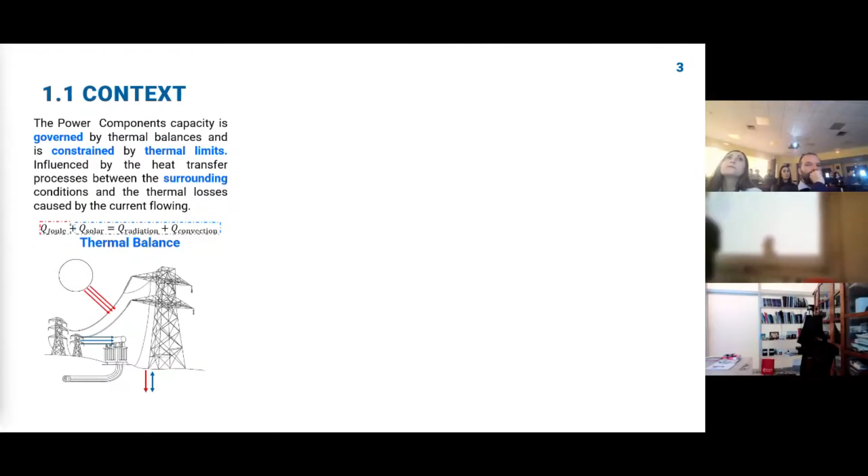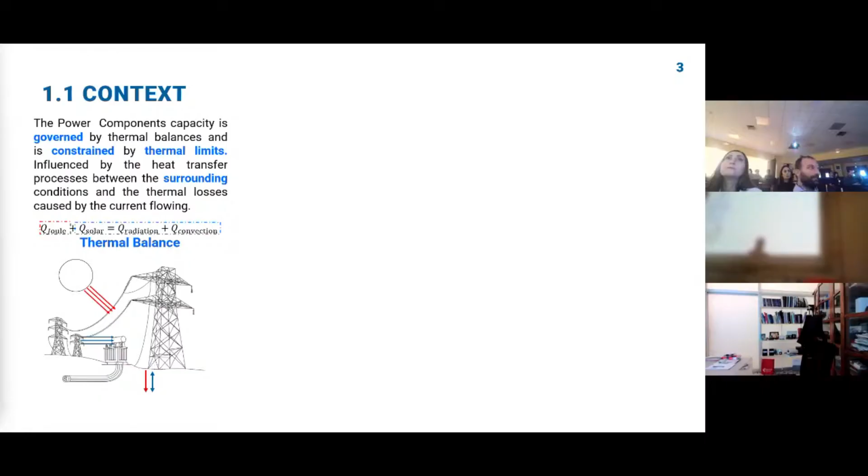Thermal limits. The thermal balance is being influenced by two main factors. The first factor is the heat coming from the current flowing inside the component. The second factor describes how the surrounding medium has the ability to decrease that heat.

In particular, the maximum capacity, the maximum current that could flow inside the component, is proportional to the delta between the temperature of the ambient and the maximum temperature of the component. So if the ambient temperature starts to increase, the capacity will decrease.

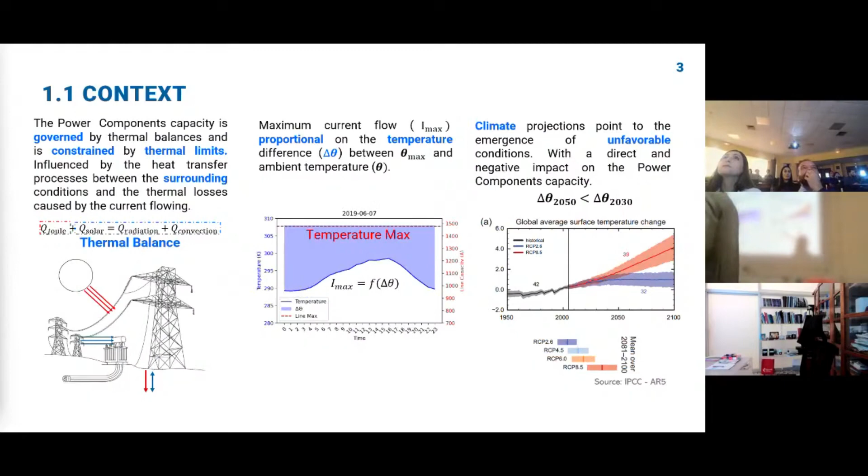However, climate projections point out that the ambient temperature will probably increase in the next decades, meaning that this delta for 2050 will be smaller than for 2030. But we don't know how much. So that raises my first question: how can we project reliable thermal limits for the next decades?

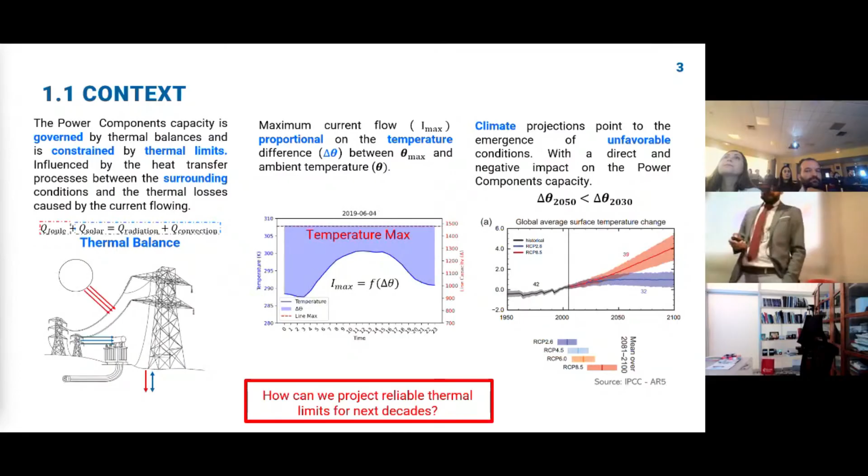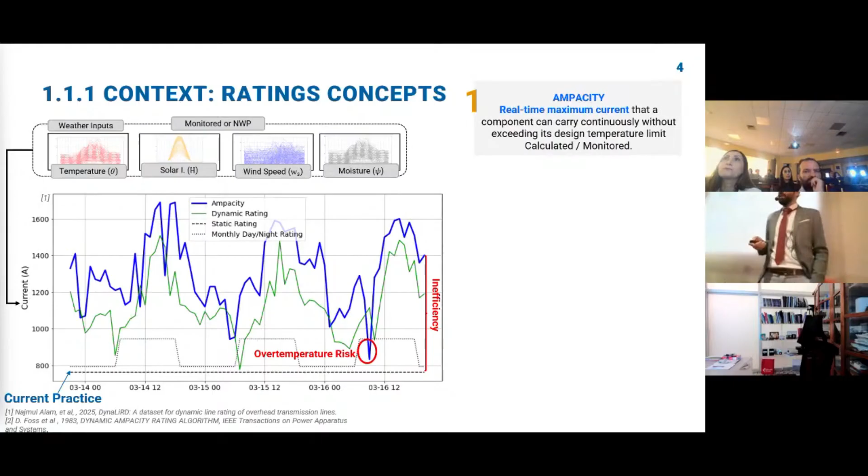Before we explain the method, let me explain three fundamental concepts in this investigation. The first is the ampacity. The ampacity is the real-time maximum current that a component can carry out safely. It could be calculated or monitored, and here you will see it in blue.

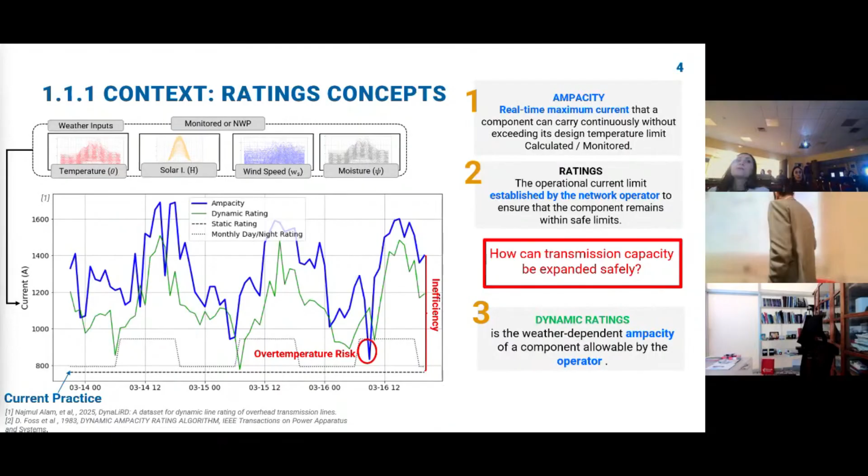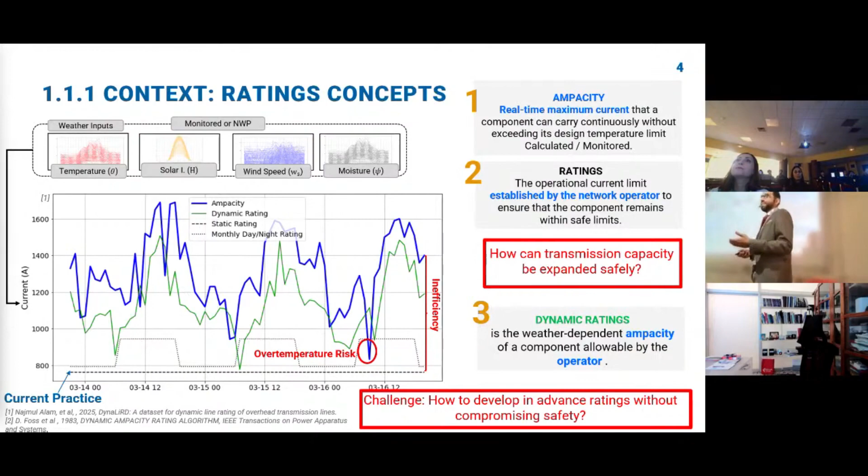However, this concept is mainly related to short term. So that raises a challenge: how to develop thermal ratings in advance without compromising safety?

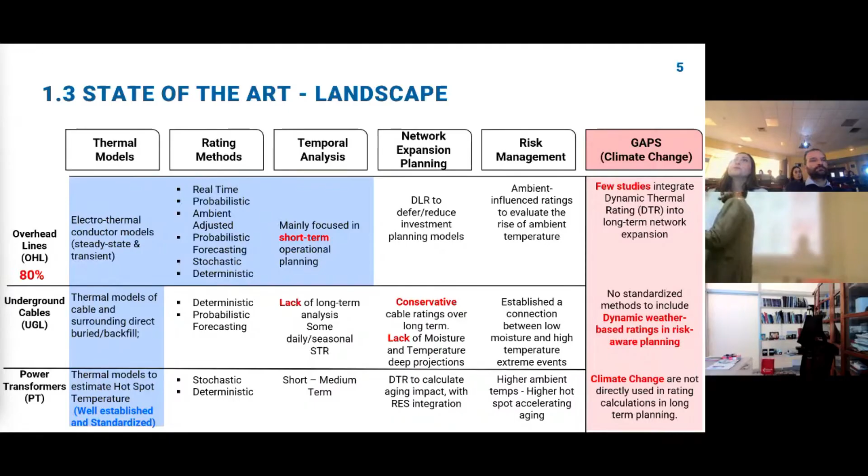Now that you can see the full landscape of my research, let me show you the key studies. It's important to highlight the studies that analyze the interconnection between climate change and capacity. The first is Bartos, who analyzed overhead lines in the United States using representative concentration pathways, and found that mean capacity in the US would be reduced by 6% by 2050.

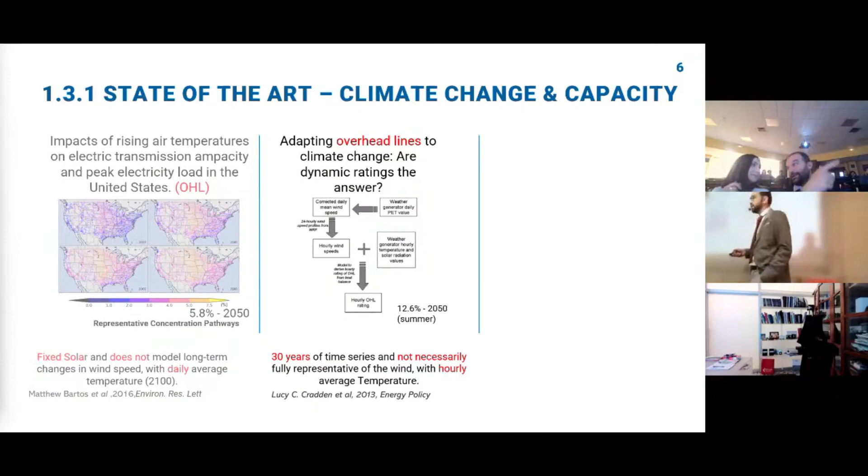The second study is in the UK. Cradden analyzed overhead lines using 100 weather generator scenarios for 2050. She found that, for example, for the summer months in 2050, capacity will decrease.

However, as you can see, all of these studies have focused on overhead lines, and probably do not fully represent all climates. So can we fully represent the future climate in order to analyze the capacity of all power system components?

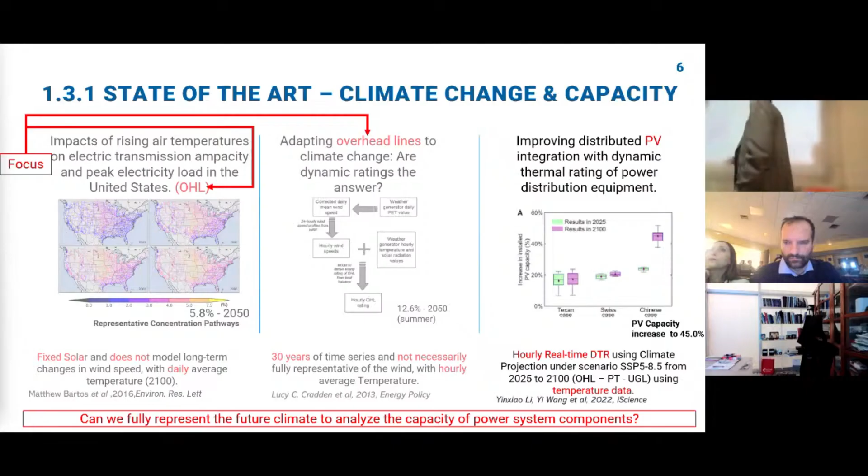The second study is related to dynamic thermal rating with probabilistics. The first is a study in overhead lines by Douglass. The important part of this study is that he released a new concept of dynamic thermal rating called quasi-dynamic rating. To do that, he introduced cumulative distribution functions inside the ratings in order to let the operator factor in risk.

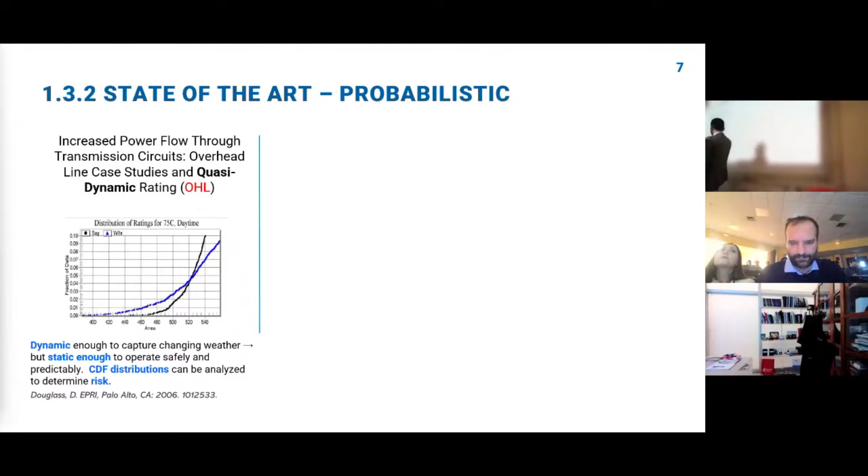The second is probabilistic management of risk. Here, Bracale introduced a probabilistic forecast for demand and generation in order to control the risk inside the power transformer. He found that this methodology could reduce economic losses by over 65%.

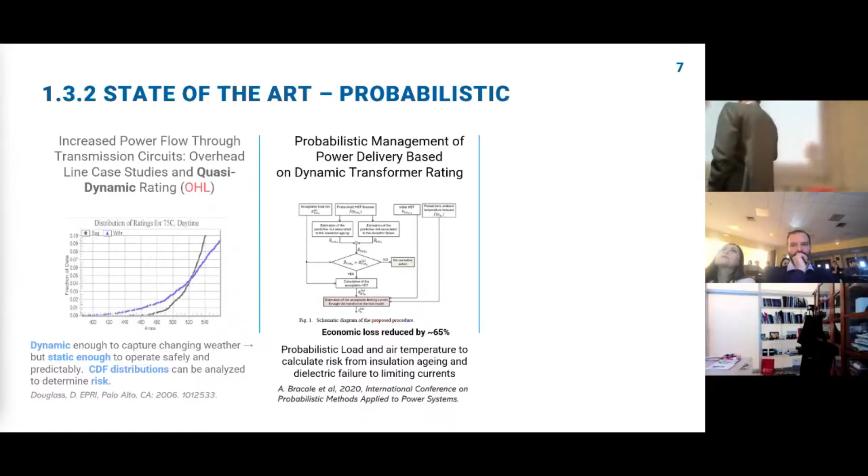The last method also uses cumulative distributions like Douglas's, but this time selects a time-based subset, meaning you can choose monthly or hourly frequencies. We found that using this approach, capacity increases over 33%, while still controlling the risk.

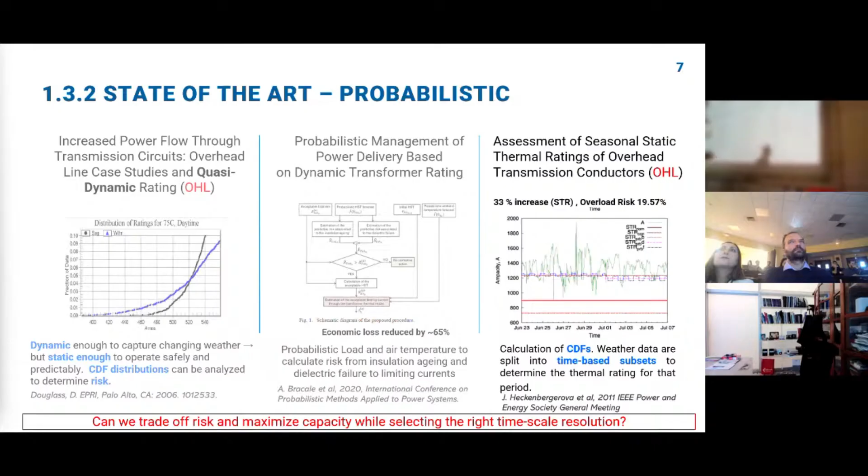So now, beyond studies analyzing capacity, we need to see how rating increases relate to risk. The first is Bucher, who introduced robust control inside the rating using a probabilistic constraint, finding that this could reduce cost by over 7%.

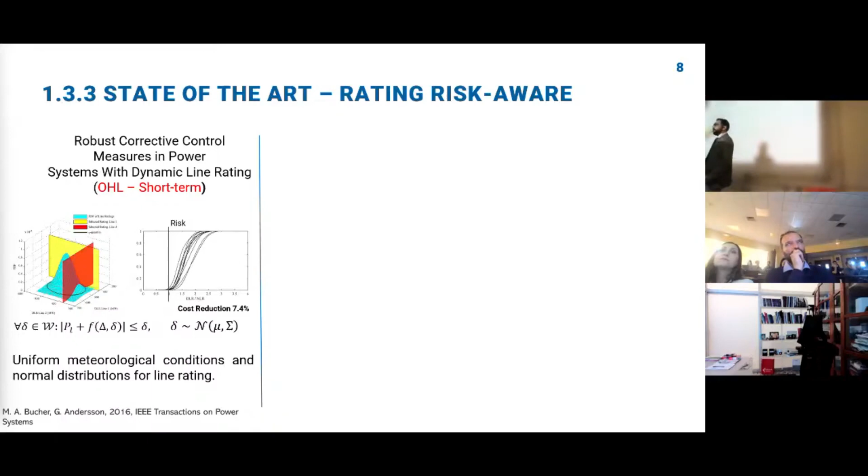However, all of these investigations have focused on overhead lines and on the short term.

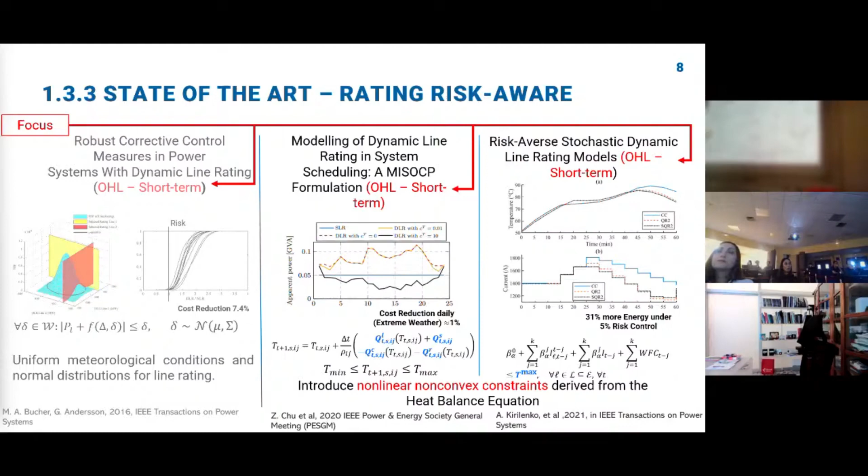So all these insights shape my contribution objective. The main objective of my thesis is to develop a methodology for long-term power system planning that incorporates the interrelationship of three main concepts: thermal ratings, network planning, and climate change.

This will be addressed by six questions. The first is how to calculate the thermal rating in advance, including variability and capacity. The next two questions relate to how to introduce these ratings inside network planning. And the third concerns how climate change impact will be assessed using the previous findings.

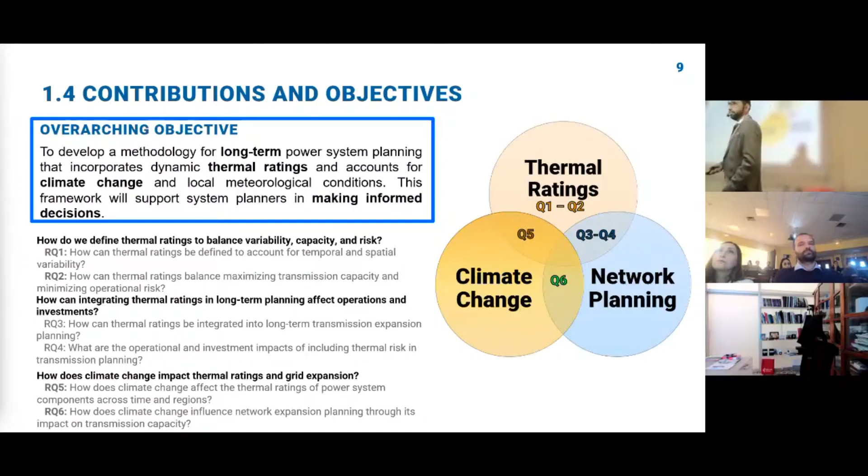So until here, we have established the context and the main questions of my research. The following slides will focus on answering only one question: how we could calculate in advance the rating for the next decade.

So first, it's important to highlight that in order to calculate the ratings, we first need to calculate the ampacity. And in order to calculate the ampacity, we need to use thermal models. The most used and most studied one is the thermal model for overhead lines.

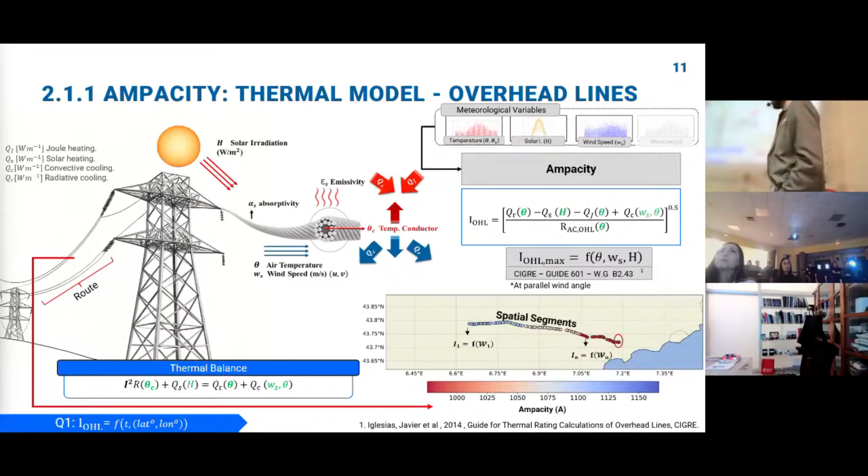This model is mainly governed by the thermal balance and is influenced by ambient temperature, solar radiation, and wind speed. However, as we know, overhead lines can extend for many kilometers, so this methodology analyzes the spatial variability of each segment inside the line in order to find the worst condition.

The next thermal model I'm showing is for underground cables. The main difference between underground cables and overhead lines is that heat exchange now occurs with the soil. Second, this component is typically installed at depths from 80 centimeters up to 5 meters. Third, the thermal balance formulation is mainly influenced by soil temperature and soil moisture.

However, this thermal model has a challenge: we need to find a resolution for these two factors across different regions in order to calculate it.

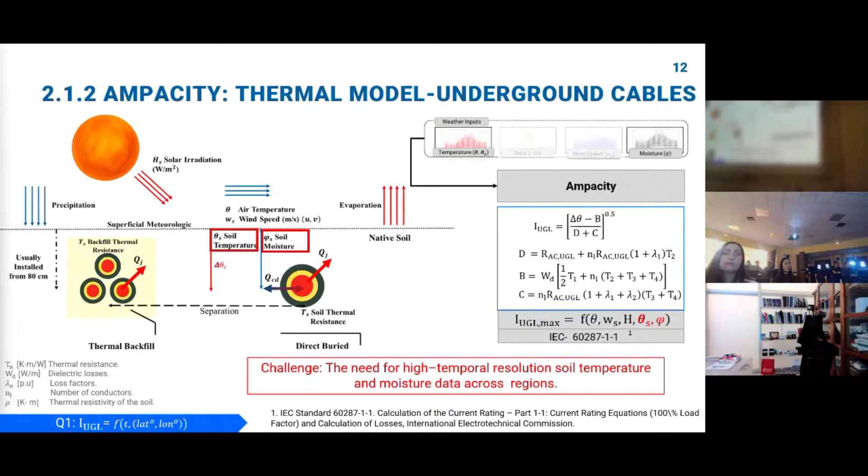To understand this, it's important to highlight that the physics behind soil temperature and soil moisture are non-linear and complex, and are mainly influenced by soil type and climate meteorology.

So in trying to find the data to model this, it's not an easy task. For that, I used my first method as a solution.

I use soil classification and climate meteorology in order to predict soil temperature and moisture. Now we have the opportunity to calculate the thermal resistance of the surrounding soil across regions and across time.

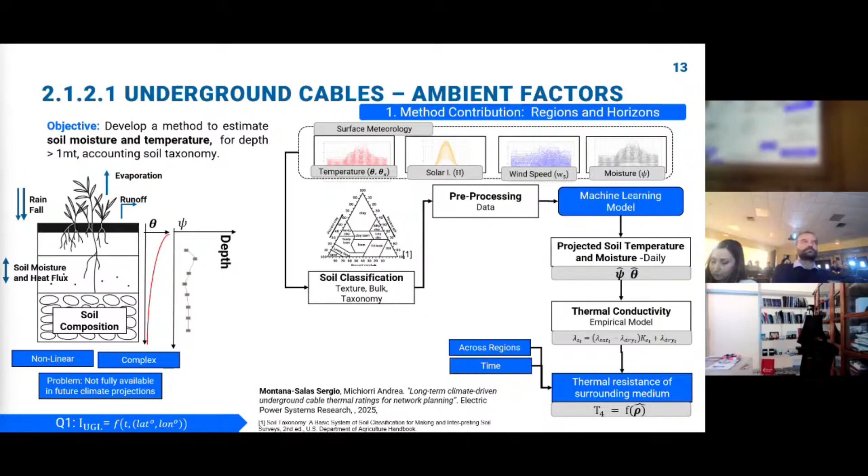This means that if the operator wants to calculate the ampacity, for example, they can use it for the next decades.

Now we have our last thermal model: the power transformer. This thermal model is strongly influenced by solar radiation and ambient temperature, and the key factor here is the load factor.

So here we use well-known standards in order to calculate ampacity, though it's mainly modified to introduce the influence of solar radiation.

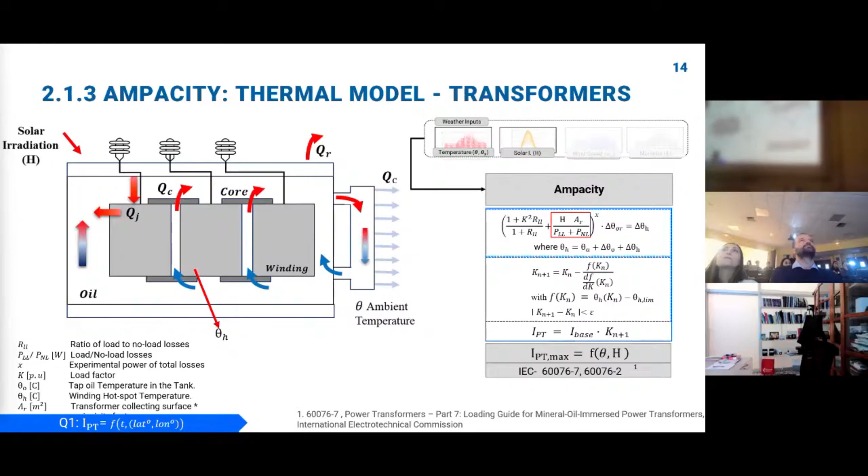So at the beginning, we showed how to calculate ampacity using thermal models and weather. But I still haven't answered the question: how are you going to calculate this in advance?

The current system uses this thermal methodology, and we focus on a trade-off between maximizing transmission capacity while controlling the risks. So let me tell you how I do it.

It's a five-step process. First, for the specific location of the conductor, I gather the meteorological variables. Second, using the specific thermal model, for example for overhead lines, I calculate the ampacity. In this specific figure, you can see the calculation of the ampacity over 50 years.

After we have all the simulation, now we have the possibility to divide it by specific temporal subsets, for example 1 hour to 1 year. With that, we are going to focus on the lower tail of the distribution of the subset in order to gather the experience.

So let me show you here the picture. Here we have a 4-year capacity calculation. Here, each color is a subset. Here is monthly, and in this subset we focus on the lower tail. So you see the red dots.

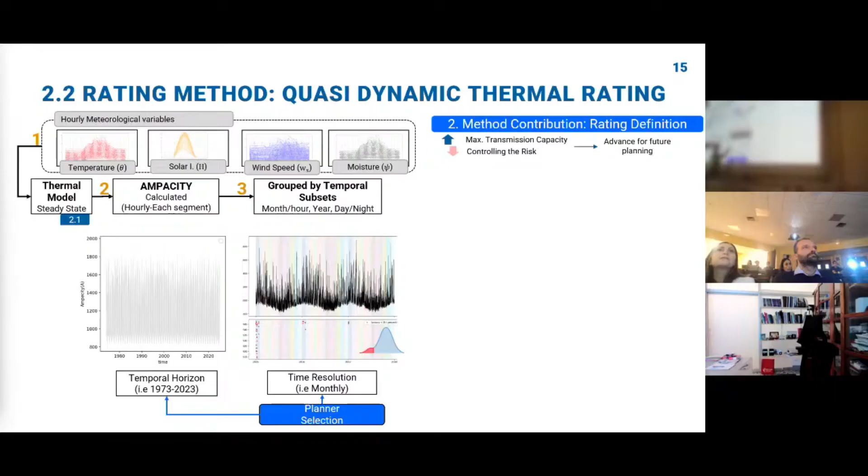Now, with this observation, we have the possibility to fit it inside the power law. This is mainly because using that, we could use a lower threshold limit that will be related to limiting exposure to extreme climatic events.

So here we have an example of ratings that, in order to build this, we use a subset of monthly hour. So I will describe monthly hour. In that, we specify a low threshold that is going to be 1 per 1,000, and with this threshold, we could build different ranges across months and across hours.

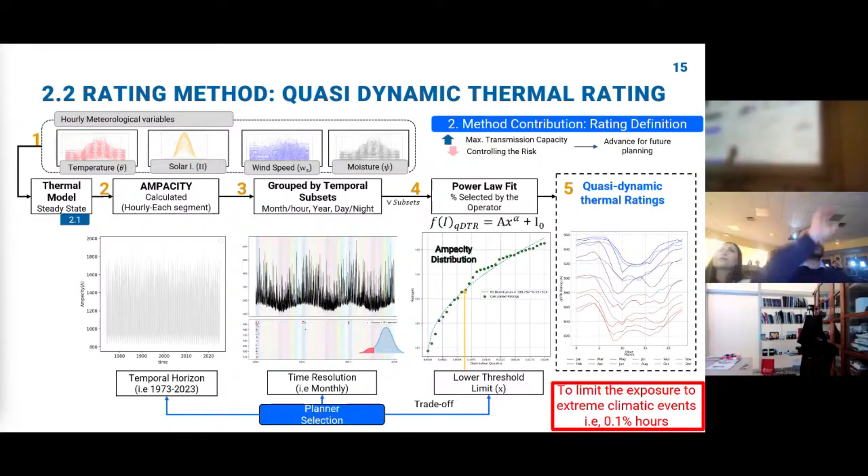Because of the problem with the sound, yes, time on 45 minutes. Can you try not to use this one and speak close to this? Of course, because if there's echo? Yes, maybe. But don't get too close. I cannot move from here. One second, first let's see if they hear. Hello? Professors? Yes, it's much better when you use this one. Okay, let's do it like this then. So I'm going to stay here. Yes, please, I'm not going to move. Yes, sorry for that. No, I will do it like this, okay? The audio visual. Okay, sorry, this is research, I'm going to have to show it.

So until now, going back, until now we have established how to calculate the ratings in the next decades. And here we find the first result for the first methodological contribution, that is to use a machine learning model in order to project the soil moisture and the soil temperature.

So in order to do that, I trained 5 machine learning models using all the soil composition observations, surface meteorology, and observations for 32 stations. With that, we see that with the result of these machine learning models, we not only improve the variability of the variable but also improve the accuracy. So as a result, we could now project soil temperature and soil moisture for the next 50 years if we want.

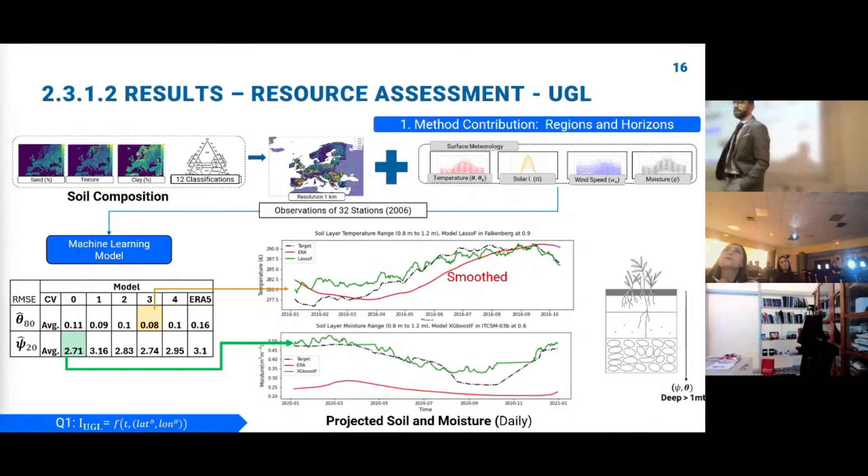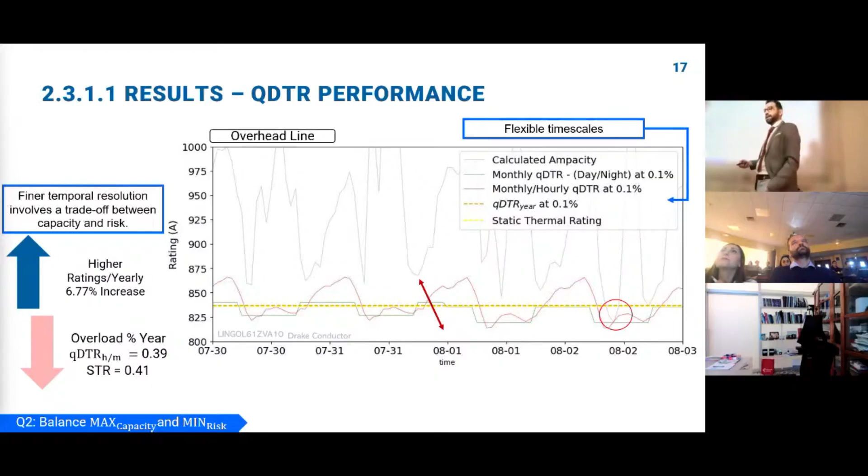The second is the QDTR performance. So in order to see the performance, in the left part we see the trade-off of QDTR: higher rating, lower risk. And here we see the possibility to select different kinds of time scales. Let me give you an example.

Here we have an overhead line. Here in the previous one, the gray one, we have the results of the capacity. But here is the QDTR calculated on a monthly hour basis. So now we not only expand the maximization of the capacity, but we could also reduce this risky zone that could overheat the component.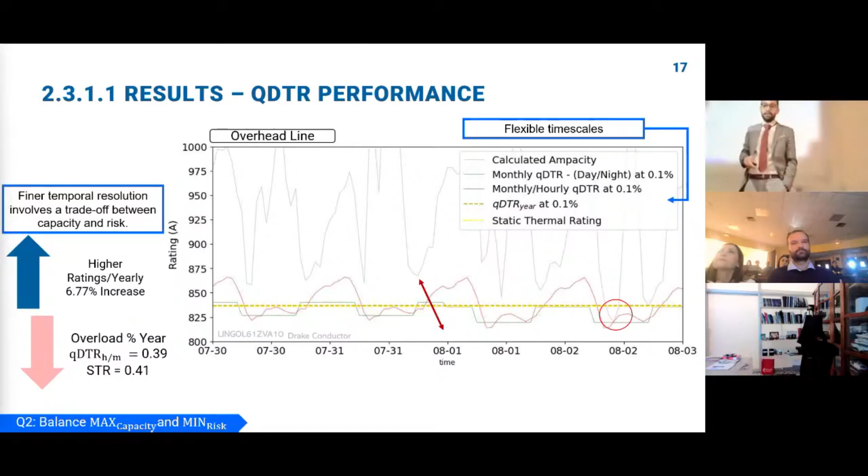The second is the temporal performance of the QDTR. Let me explain this slide. We could see 3 things. First, that it is time dependent, meaning we have the possibility to select monthly hour, as I showed you before.

The second is the seasonality. In some months, there is maximization of the rating; in other months, there is a reduction of the exposure to the climate zone. And the third thing that we show here is the difference between models. Underground cables, as you see here, show reduced variability, mainly due to the influence of the soil inertia.

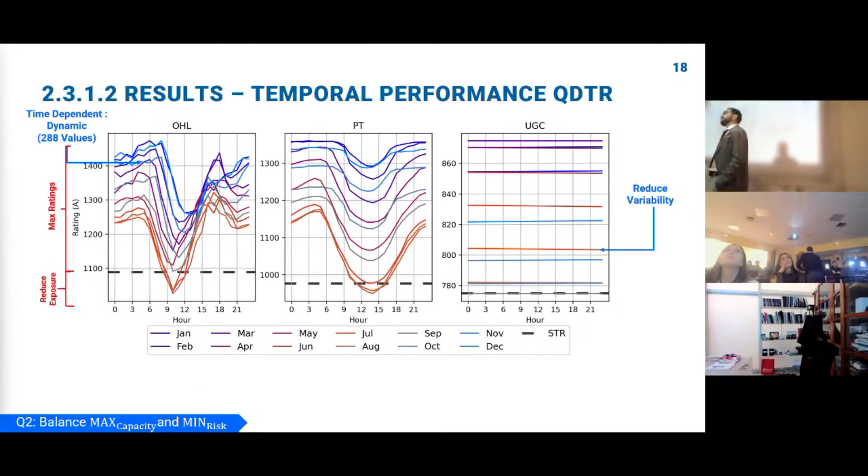The third result is the spatial performance of the QDTR. Sorry, I was moving. Of the QDTR. So to do that, we ran the same previous methodology, but this time across Europe, with 0.25 resolution and over the last 50 years.

With that, we could see some interesting things. First, underground cable rating is mainly strongly connected to the strong influence of the soil taxonomy. For that reason, you see all this variability of the ratings. The second, power transformers: the results of the rating are more pronounced in some regions, mainly because, if we remind, this thermal model depends mostly on the ambient temperature.

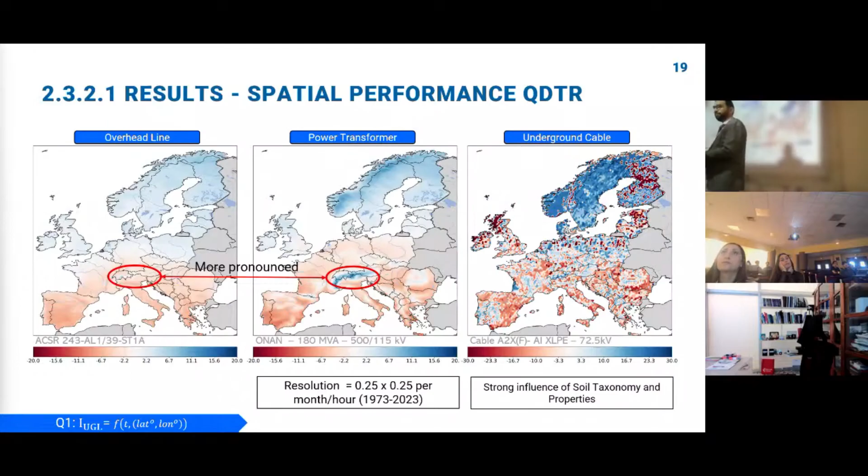So until here, we have the summary of the first chapter. What was my motivation? I need to calculate in advance the rating. How did I do it? Two contributions.

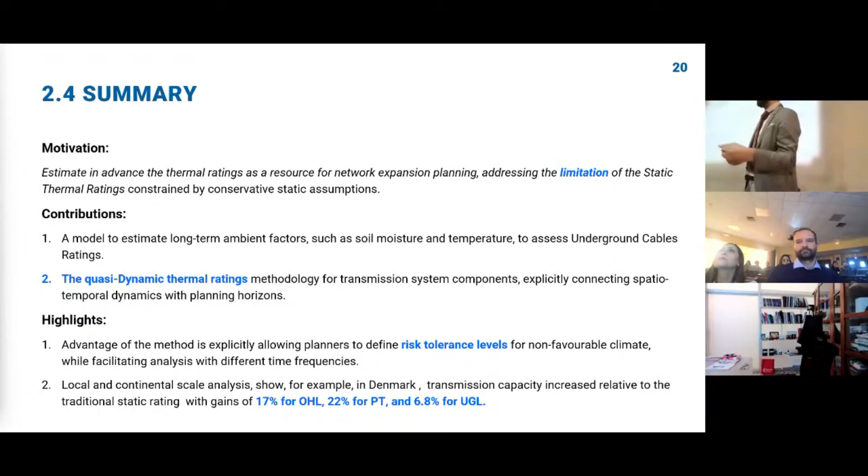First, in order to gather the information for underground cables, a new model to estimate projections, soil moisture and soil temperature, in order to calculate the thermal resistance. And the second and most important one is the quasi-dynamic thermal rating.

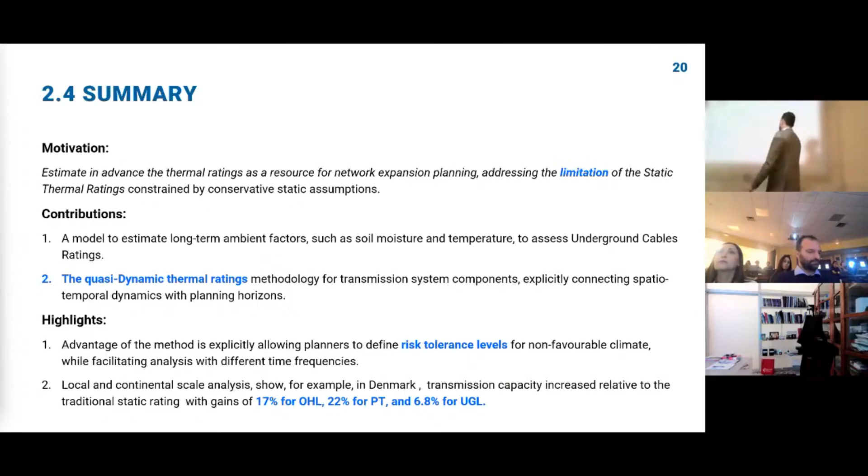This is not only a methodology, this is a rating description that should be integrated inside the dynamic thermal rating. With this, we could maximize the capacity, for example 22% in power transformers in a regional way. And second, meanwhile controlling the risk.

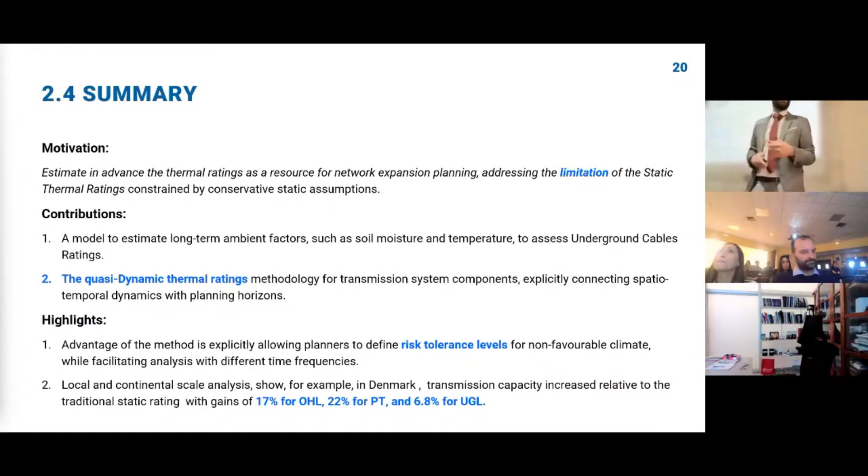Because I have to say that all the previous results that you saw is with 1 per 1,000 lower threshold risk. So until now, I established the tool or the methodology in order to calculate the rating interval. The second, in the next slides, I will focus on how to integrate this thermal rating inside the network plan.

So here I'm bringing to you a typical network expansion plan formulation as an optimization problem. This optimization aims to reduce, to minimize the system cost. However, it's important to highlight here that it's mainly focused on controlling the capex of lines and power transformers, and not generators.

And we did it because we want to isolate the influence of the QDTR.

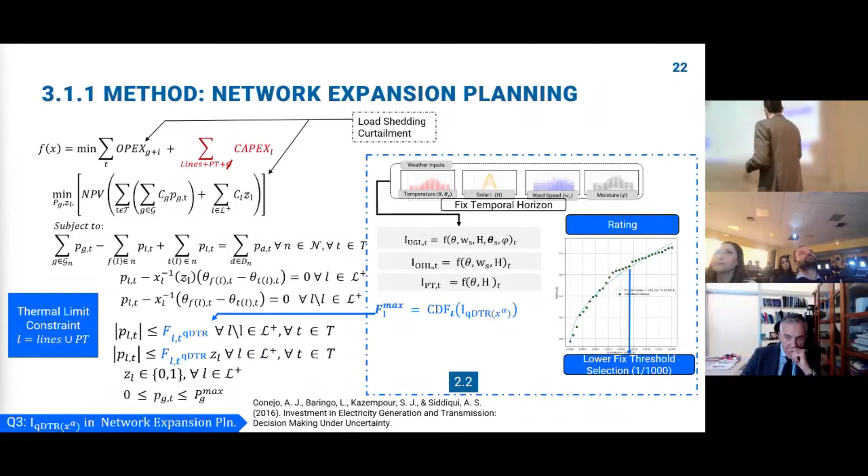So a little bit about how it works for each network component, for example underground cables, overhead lines. I'm going to calculate the QDTR, that's a cumulative distribution, and I'm going to fix a specific lower threshold. As I said, normally all my studies are done with 1 per 1,000. And with that, we're going to replace the maximal limit constraint inside the thermal limit constraint of the optimization.

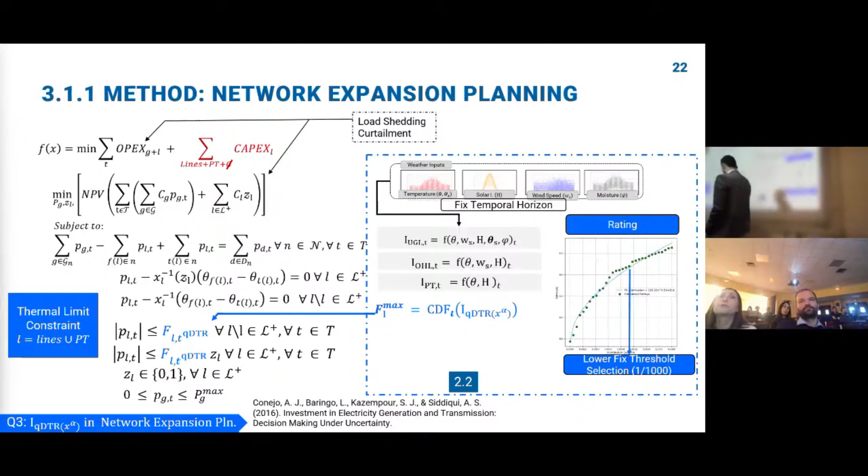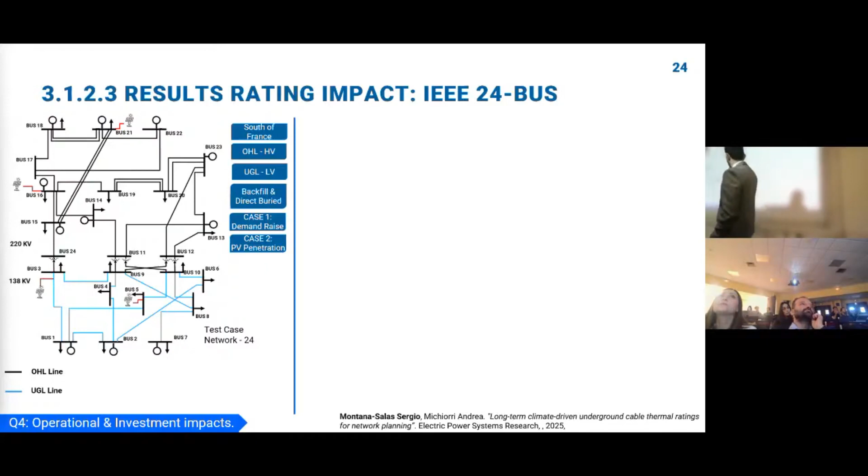The second is, in order to overcome the limitation of PJM, I decided to move to a specific network test case. So as you can see, the 24 nodes here is projected now in the south of France, and it's included the QDTR for lines, underground cable - we replace it here - and overhead lines, and we analyze it in two typical cases.

This result is very important. First, because of capex reduction - that means that with the use of QDTR with a thinner resolution, we don't need to build more lines. However, the second result is that now we have PV penetration, we see that the QDTR highlighted dangerous zones when we have the probability to have high flow caused by the PV and reduced rating caused by the seasonality.

And at the end, that means that we need to build new lines for these two consequences. Now we're moving from macro to micro, meaning that now we analyze the impact of QDTR in lower voltage distribution networks and middle voltage distribution networks.

In the future energy transition path, that means that we have a high increase of PV and charging stations. So the result here in case A is that using the QDTR with a thinner resolution, we could reduce the total violations by nighttime, you know, when people arrive home, you need to connect and charge the vehicle.

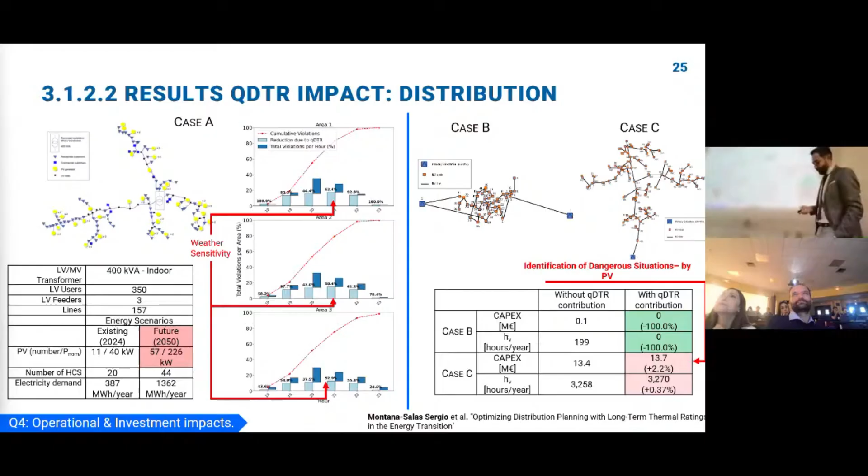The second, case B and case C, is a medium voltage. We see the same result as previously, meaning that we confirm that using the QDTR in the cases where we only increase the demand, the investment is reduced, so no new lines. But also, when we use QDTR where we have high penetration of PV, we highlight and identify dangerous situations, and at the end it will result in new investment inside the lines.

So we need to make a stop here, because all the calculations that you have seen before, I need to highlight, have been with QDTR. And the QDTR, in order to calculate it, we remember the thermal balance equation is mainly with maximum continuous loading and a fixed threshold, 1 per 1,000. However, this is too conservative, so that kind of detail is mainly what my investigation wants to overcome.

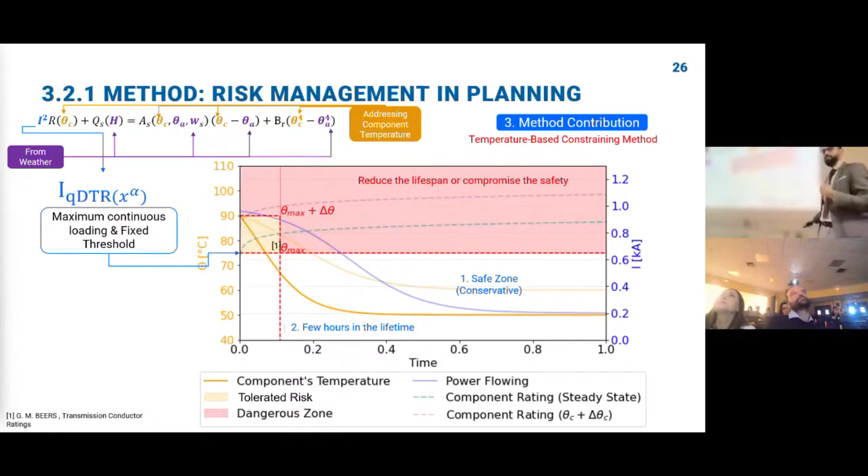So for that reason, it's coming my third methodological contribution. That is a more precise temperature-based constraining method. So let me explain this title.

So as in QDTR, the component should always work in the safe zone. The safe zone is below maximum temperature. However, it's possible for a few hours to extend this zone to a tolerated risk zone by a delta of temperature. So now the component could not only work here, in our conservative area, but could be extended in a small area here in yellow.

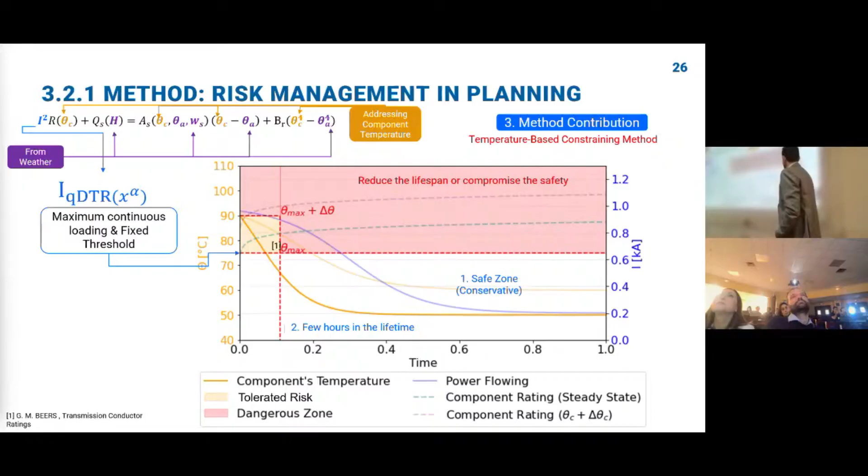If it's working in the red shadow, meaning that now the component has a high probability to reduce the lifespan or compromise the safety. So I'm going to explain it more in detail.

For now, in order to do that, we calculate the cumulative distribution for a specific line in order to gather all the current flowing.

For each value of the cumulative distribution in that specific line, we use our thermal balance equation, gathering the information of the weather and the rating in order to calculate the temperature. So with different sets of specific weather related to that point, we calculate the temperature, and we do that for all the current distribution.

With that result, we could build our cumulative distribution of the temperature that you see here in yellow. However, if the result falls outside this yellow shadow zone, meaning that we are now in the risk zone, a control should be done, and the control is to reduce the rate.

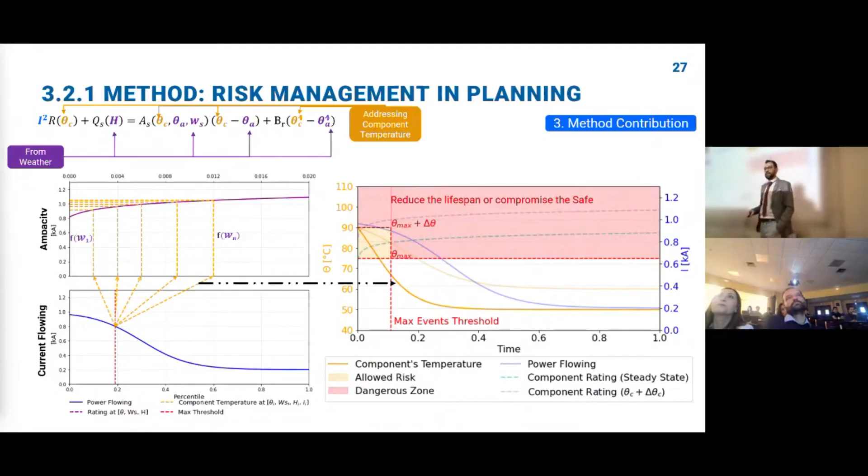So from the graph, we are coming to a flow. Let me explain the same methodology now with a flow. From a specific scenario input, we calculate the QDTR plus a delta temperature for each time step.

For each time step, we run Monte Carlo using optimal power flow plus optimal power flow with contingencies. With that information, the result of the Monte Carlo, we could build density functions. Here, for example, we see the density function result of the power flow normal.

And all these are the density functions of each contingency over the line. Why do we do that? Because now with that, using a specific weighted density function, we could calculate our final current density function. Why do we need that?

Because with that, we could use the cumulative distribution with a set specific temperature in order to calculate the risk. So at the end, if the risk is in the no-risk zone, the rating will be replaced inside the network plan. If not, we need to reduce the rating and start again the procedure.

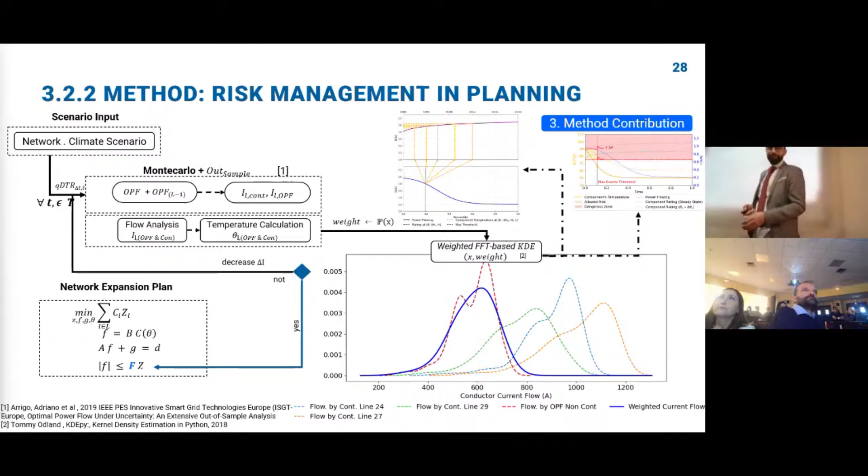I need to remind that this procedure also uses out-of-sample in order to clarify that the results are correct. So let me show the results of this methodology.

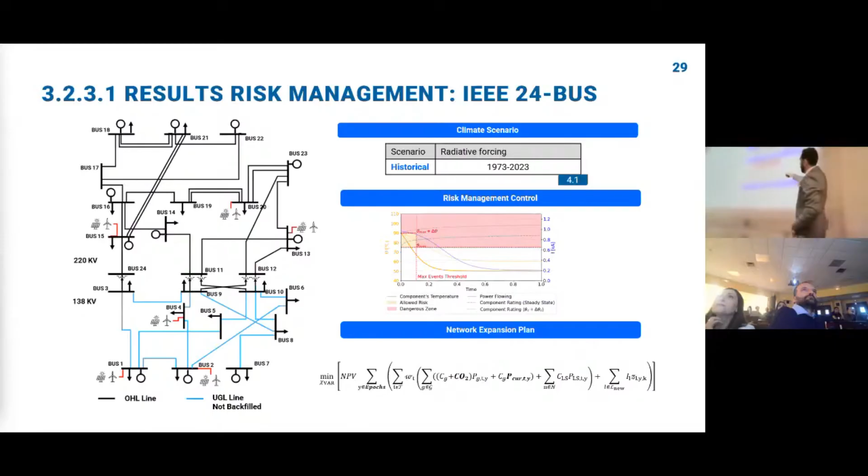For this, we use our test case. It's a similar test case, but this time with our risk management control, and the optimization will be expanded a little bit in order to include a multi-period optimization.

So we have the results, but before that I need to explain a little bit this chart. Left columns are QDTR calculated yearly, in time yearly. Right column, QDTR calculated monthly hour.

Yellow results mean the results of the use of static thermal rating, the conservative approach that uses 40 degrees, for example, as the temperature. The second is the power flow result for the QDTR yearly using the methodology that I showed you before. So there are three behaviors to show here.

First behavior: in specific lines, by the use of QDTR yearly, we show the same contribution that I showed you before, a complete reduction on the investment. It's not necessary to do an investment, a new line, in this specific case.

But the second behavior is more complex. It shows that using the static thermal rating in another line, lines 18 and 22, we need a new investment. Here, the rating starts with a specific calculation, but before the investment, it's constrained enough to be held until 2040, and in 2040 we need a new investment.

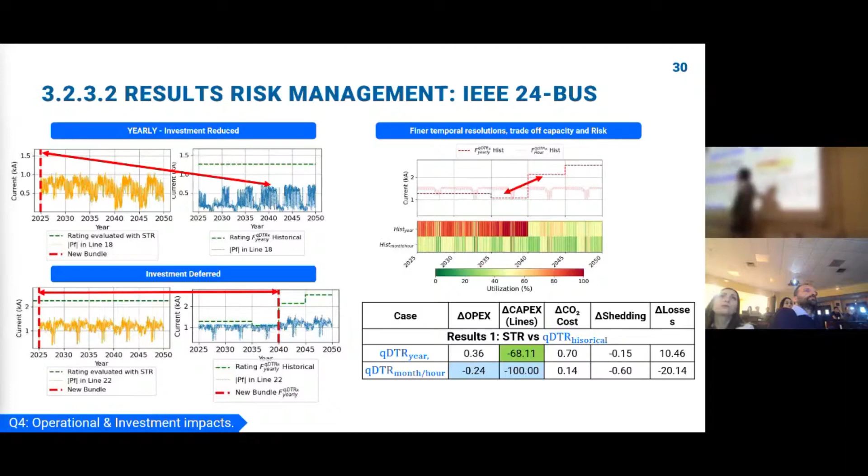So here, we delay the investment using the QDTR with risk control. And the third one is...

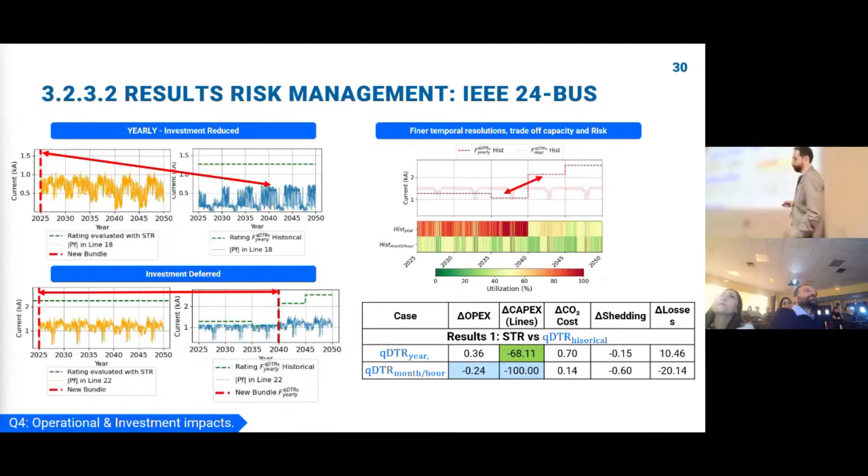Now the same line, but with a thinner resolution of QDTR. So imagine here we delay, and here we start again. We reduce completely the investment, only by selecting a thinner resolution of the QDTR.

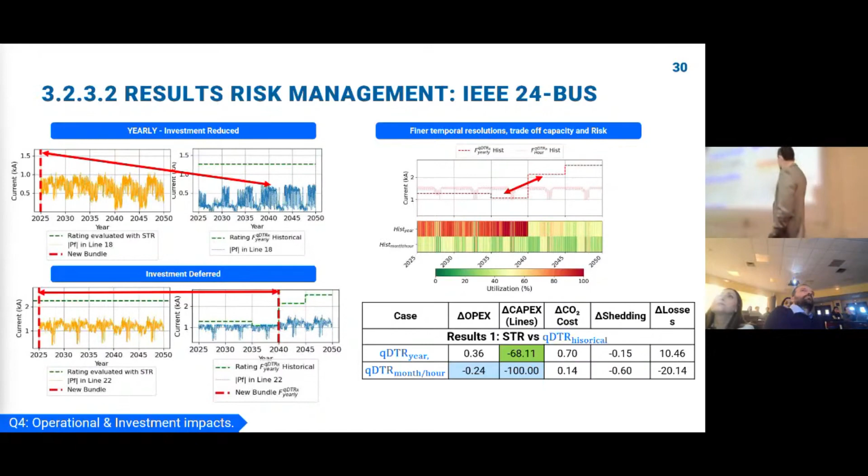Meaning that when we change to a thinner resolution but include the risk control, we could reduce all the investment over the case.

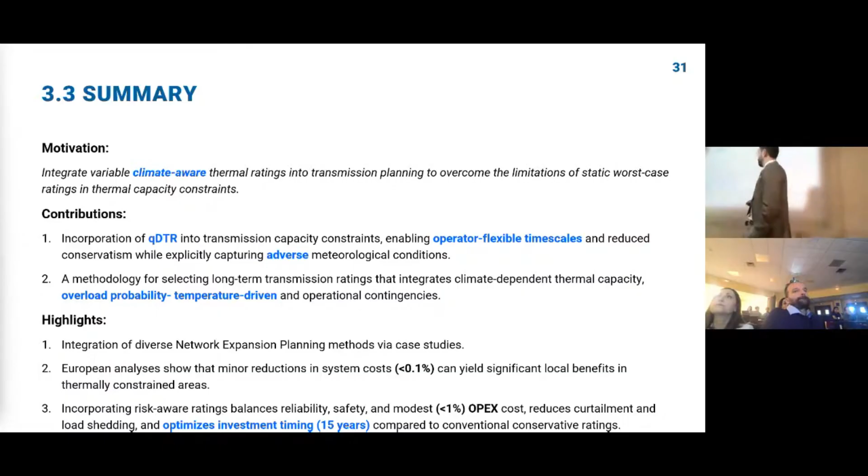So as a summary, the question is: how to integrate the QDTR inside the network planning? To answer, the first method is introducing the QDTR to replace the rating directly inside the network expansion plan. The second is a temperature-based, more constrained method in order to calculate the rating.

To highlight, we used this case in different network expansion plannings, and we found similar results, showing the performance of the QDTR. And lastly, if we use the risk control, we could delay investment, and also reduce it if we change only the resolution inside the QDTR.

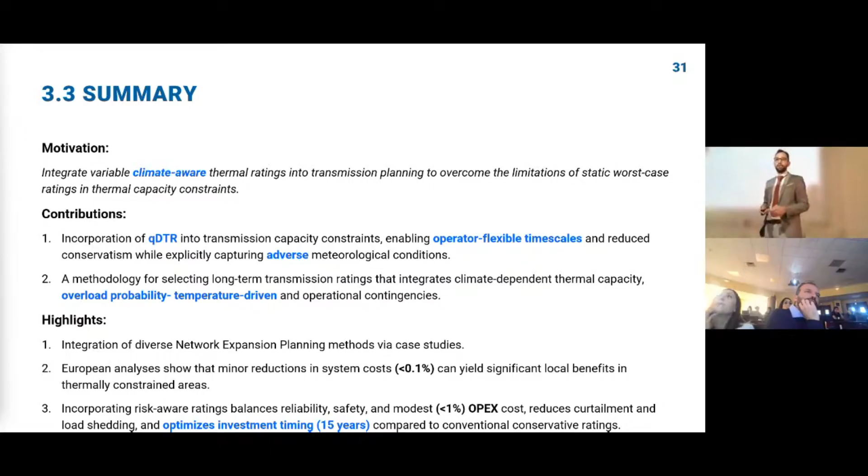So until now, we have established the thermal rating methodology and how to introduce it. Now we need to answer a question: how to include climate change and what the impacts are going to be.

It's important to highlight that all the calculations and results I showed before are with historical values. However, if I want to analyze a network today or plan a network today, it must work in the next decades. And we know that in the next decade, the temperature is going to rise. So how did we find a solution for that?

My new framework here introduces all the methods that you saw before, risk control, QDTR. However, we change the data. Now the data is future data about climatic conditions. For this, we are using specific data, the climate and energy indicators from climate projections, as a proxy or best information available for long-term climate conditions.

Let me explain a little bit more about this data. This data is made according to the representative concentration pathway, corresponding to the radiative forcing that is related to CO2 emissions and greenhouse gas emissions too. Also, it's important to highlight that this dataset has a link with electrification.

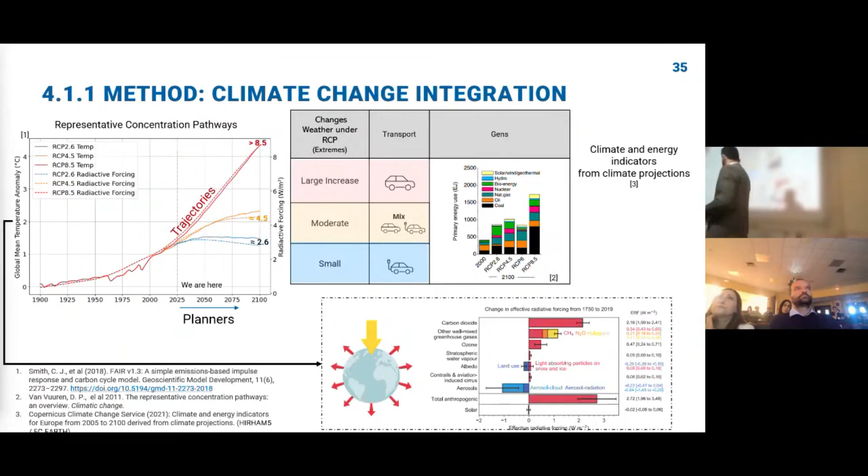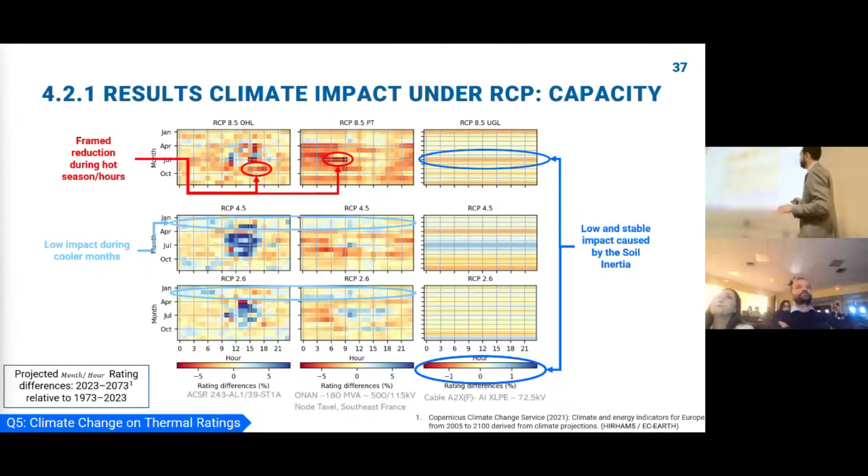For the following results, we use the same methodology shown before, but now in a continental case. We use the RCPs to calculate how the qDTR is going to be for 3 main components, so the same structure. What we can see here, as a regional pattern, rather than a specific power system, is that the least impacted is still the underground cable, confirming the hypothesis. Second, that power transformers are the most stressed by climate, even up to 5.5.

However, as I said, we could see that some regions, for example the south of France and the south of Spain, will be more impacted than other regions, mainly because it's influenced by the temperature of the ambient. And the third thing we see here is that in all cases we saw reduction, meaning the climate will reduce capacity in different scales, but it will reduce the capacity of the network.

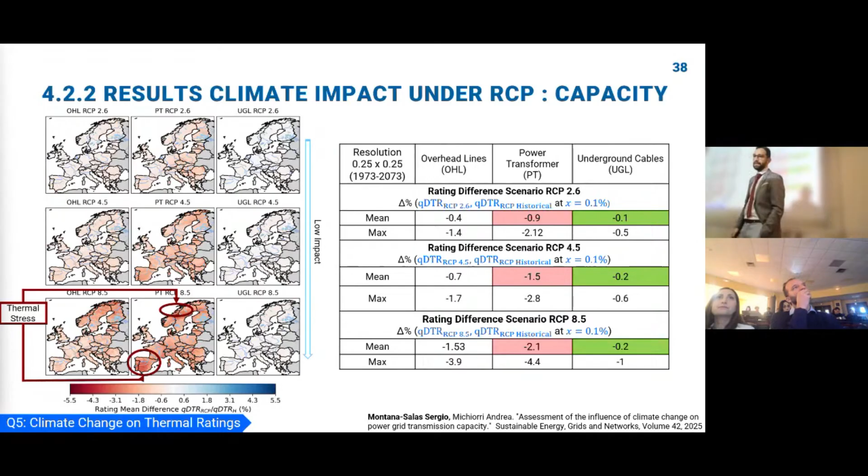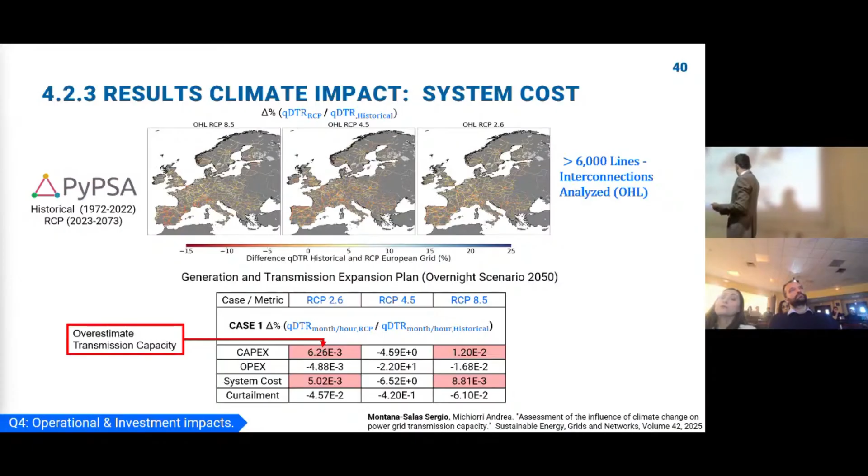Now we analyze how the climate impact affects system cost. We use the previous network expansion plan, using PyPSA to analyze projections. As you can see here, the result shows the difference between historical and representative concentration pathway future scenarios. We see that if we calculate the expansion plan with historical data, we are too optimistic, meaning we overestimate the transmission capacity, meaning we need to spend more investment in the future when using the representative concentration pathway. The second result shown here is the same test case, but this time the RCPs are used not only to modify the rating, but also to influence the profile of load and renewables.

The second part here is if we plan with historicals, we are too optimistic, meaning that we overestimate the capacity, meaning that in historical we don't need investment. However, as we could see here with the RCP scenario, we need it.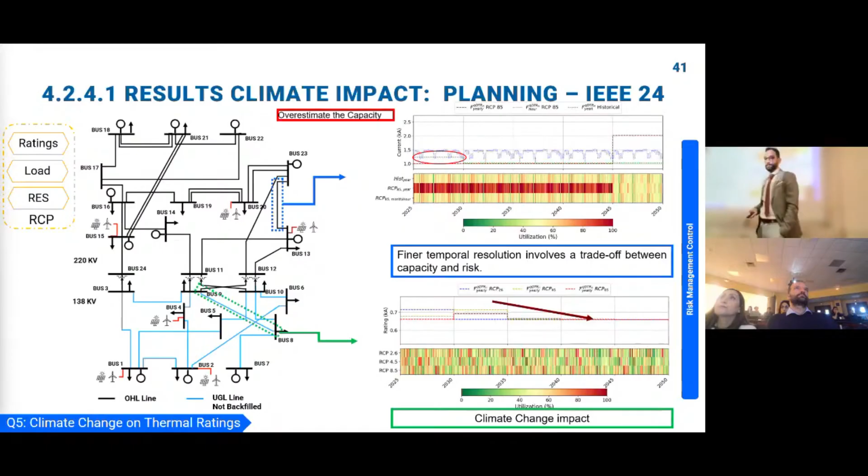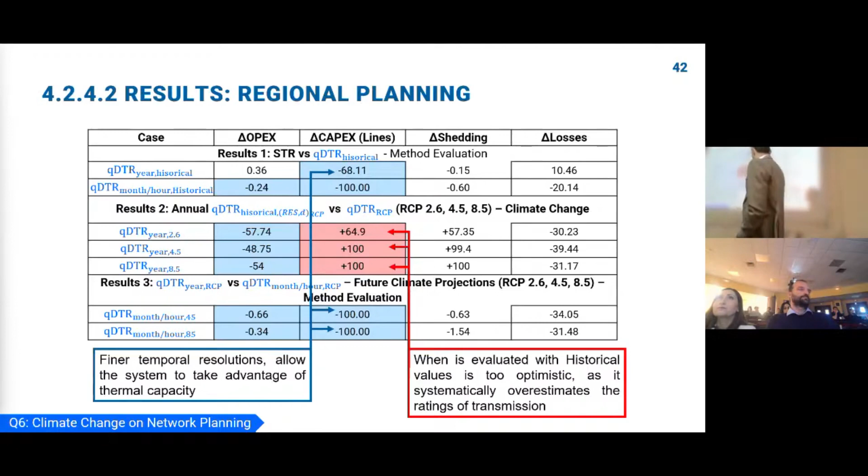So here are the full landscape of the previous result and the historical one. In this full landscape, we see 2 things: finer temporal resolution using qDTR allows me to reduce the investment, and second, when we evaluate our network using historicals, we continue being too optimistic about the results, and we overestimate the rating capacity. So for that reason, we see that the investment started to increase using the specific scenarios.

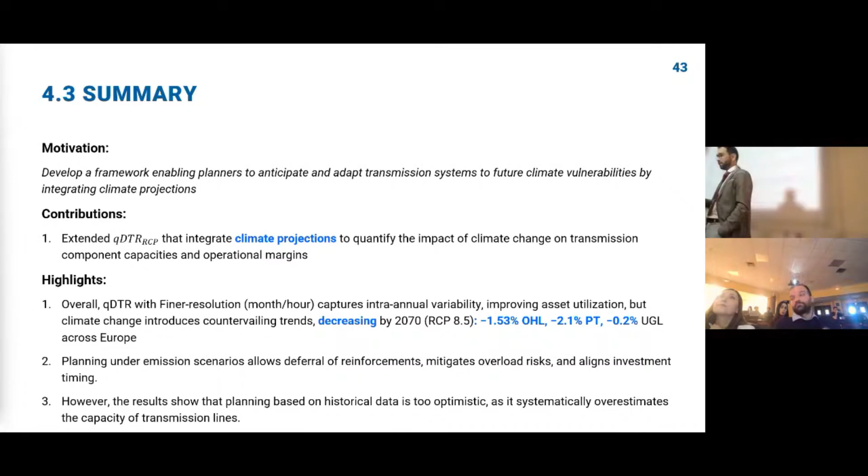As a summary, my motivation here was to involve climate change inside the 2 methodological results previously. The contribution is the integration of climate projection inside the qDTR and in the other methodology that is more constrained, temperature based. To highlight, capacity will reduce over the 3 scenarios by the temperature, and also even if we use the risk control. And the third one, that's also really important: if we use historical, we are doing a too optimistic result as a scenario. For that reason, we must include the future projection condition in order to plan.

So, conclusions and perspective. I show you my 3 subjects that are going to interact, and the results here. How can we calculate in advance the rating using the spatial variability of the weather? The result is qDTR new definitions. With this qDTR new definition, we not only maximize the capacity, but also we control the risk.

For example, in this, we analyze the Danish region. We could even increase the capacity over 22%.

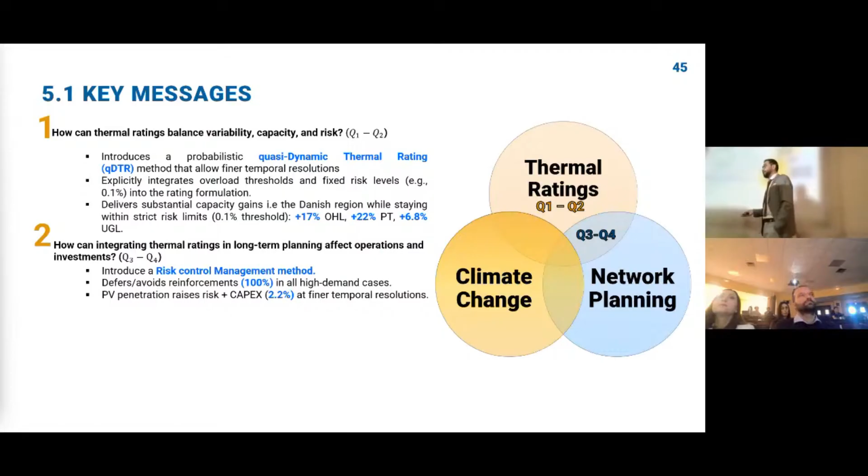The second, how we're going to integrate the QDTR: we analyze a network expansion plan, modifying the maximum capacity inside the optimization problem using QDTR. And the second is the risk control management method, that is a new method in order to include the temperature and let us expand a new tolerated risk area, to calculate, to modify the maximum capacity inside the optimization.

Also important to see here is the influence of PV. The influence of PV, if we use QDTR, that led me to highlight this dangerous zone that is not only by the weather, but also by the flow.

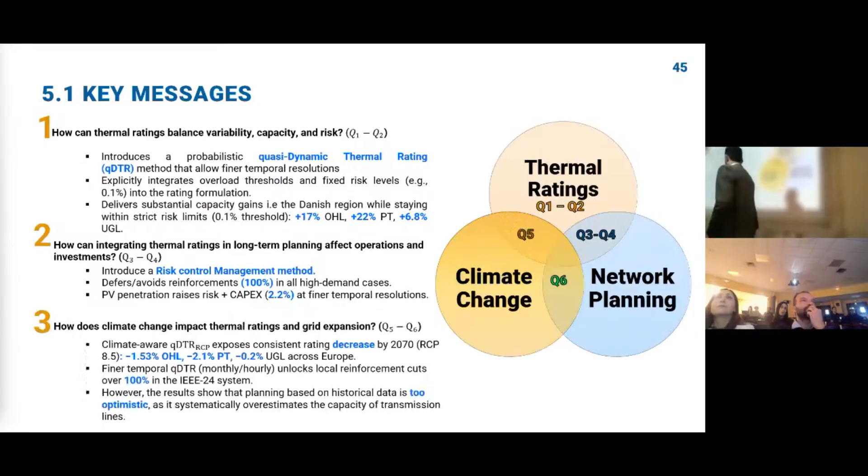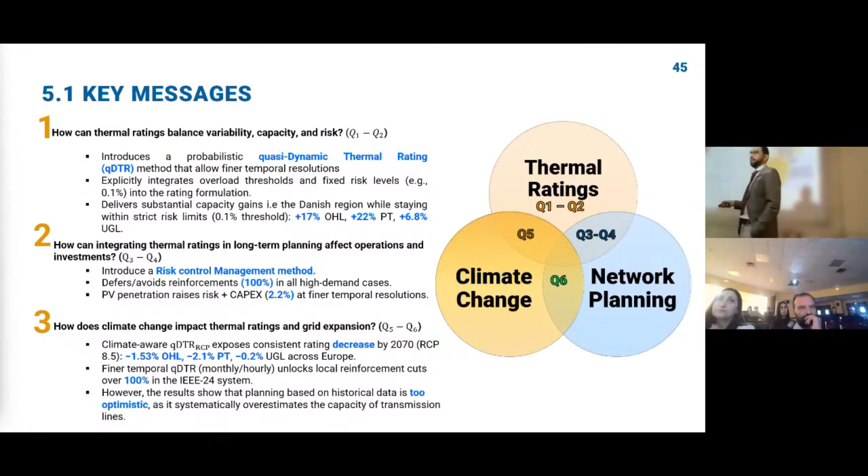Third one is climate change. As we could see before, the climate will impact all three components. If we analyze at a European continental scale, power transformer will be the most influenced one, with a reduction of 2.1. And the third one is really important: we don't have to plan with historical. We need to include the climate change inside our optimization in order to plan in the future our networks.

Perspective, of course, there are so many perspectives. First of all, it's important to update to new climate datasets that let us identify more regions, now with, for example, socio-economical patterns. Second, in the same way as we did with underground cables, in order to improve the variability of the soil temperature and moisture, we could do it with wind, for example, in order to improve the dataset.

Second thing over here is, as you could see, all my results have been done with one specific climatic scenario. In order to be more precise with the uncertainty, we could include a multi-model ensemble, so different kinds of climate models in order to assess the capacity, and incorporate the sensitivity analysis across available climate models to support in order to have better selections.

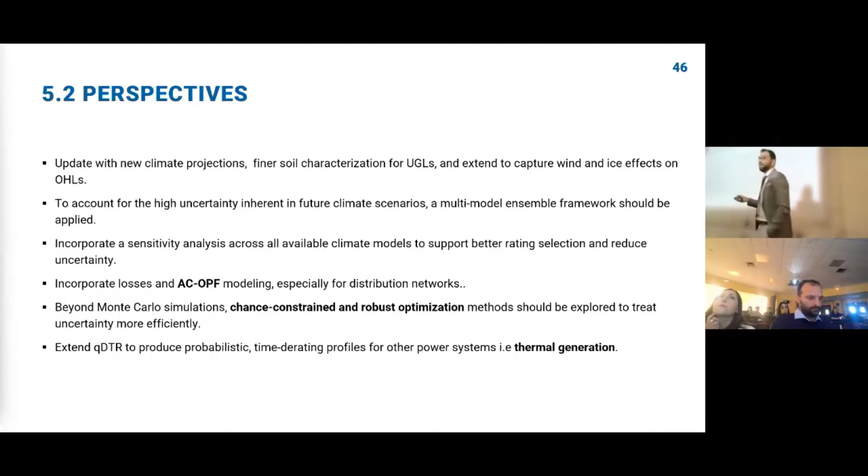The introduction of AC-OPF now, because we started to scratch distribution, so it's important to calculate the losses inside the optimization. This is because the Monte Carlo simulation is our first contribution, but we know that in terms of computational time, it's not the best one.

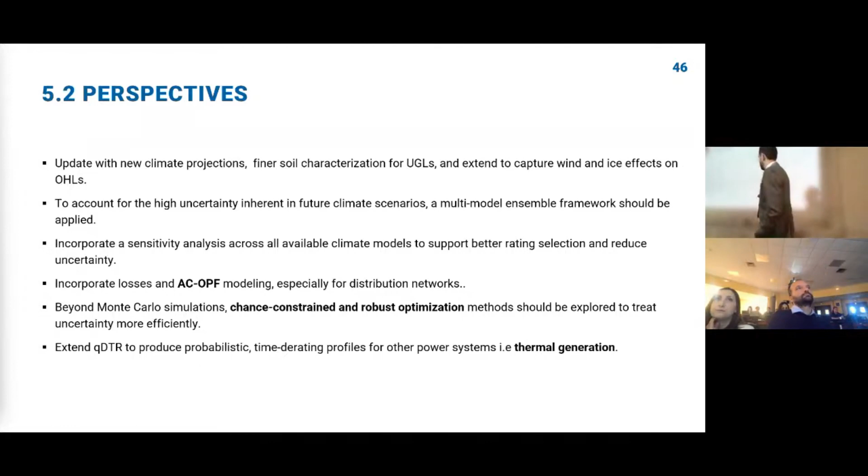So now I'm working on another research in order to introduce chance constraint inside the optimization, but also we could pass over robust optimization if necessary. And the last one is moving from transmission power system, use the QDTR, but now with the thermal generator, so that the profile of the thermal side of the generator could be analyzed with the QDTR.

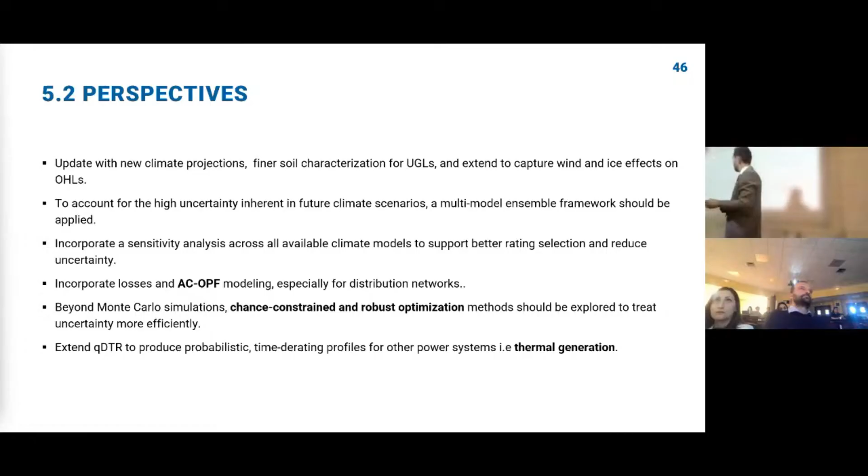Dissemination: 3 journals have been published, and 3 more are mostly coming in the next month. One is 99% done, the other is 80%, where you see all the results about the last methodology. And now the last one is 10%, which is about the chance constraint inside the power, inside the optimization. And 2 international conferences also.

So this is all my results, and thank you, and sorry about the sound and everything about the sound.